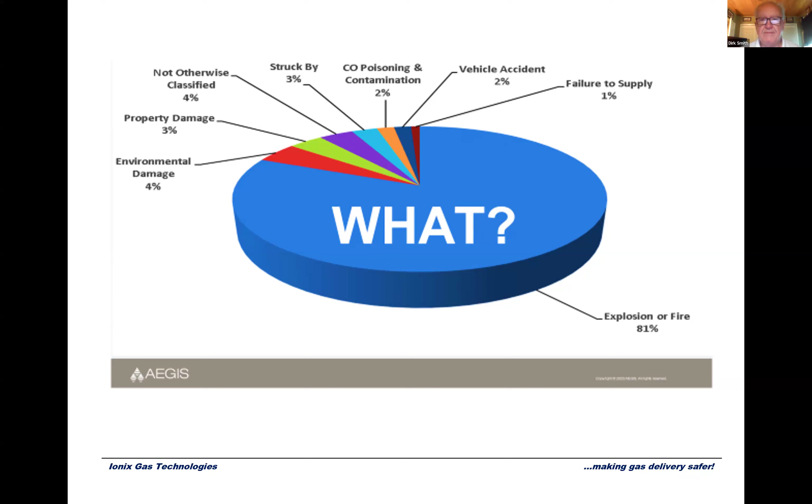But this is a pie chart showing where this insurance company pays out their claims, what causes their claims loss. And if you look here, you can see that fire and explosion are 81%. They constitute more than all the other loss causes combined. So even though fire and explosions are rarer events than vehicular accidents or property damage, they're by far the most expensive. So that's what that tells you. So here's what I want to leave you with when we do this today.

This is based on what I teach natural gas company workers. I want you to have an understanding of static electricity as the probable cause for most ignitions when we have polyethylene or plastic gas pipelines that you will encounter. This has been done by the natural gas distribution industry, who paid the Gas Research Institute and other places to investigate this and explain what's going on. So I'm going to share that research with you.

Now, I'm going to be talking primarily about polypipe because in the natural gas distribution system, in the downstream or local markets, everybody's moving to plastic pipe. There is metal pipe out there, but that is going away as gas services are by law required to be renewed, and they replace them with plastic pipe. So we'll talk about plastic pipe, and we're going to primarily talk about static electricity and plastic pipe, but it'll also apply to metal pipe.

It's important you understand that what we're going to talk about applies the same to propane. A lot of people have propane heat out in areas outside the service areas of local gas distributing companies. The principles that we're going to talk about here are the same for propane.

I want you to be able to recognize where the ignition risk originates in a gas leak. That's one of the things when you're called to a scene and you go out there - I want you to know where you should be looking for the possibility of a static ignition.

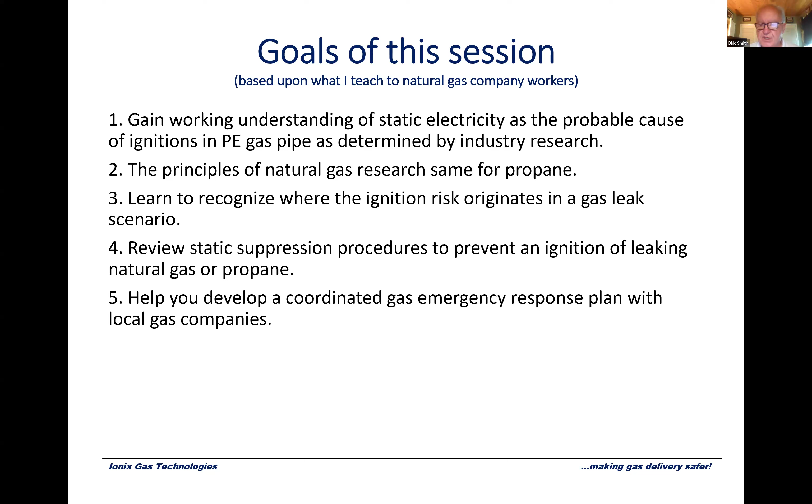Finally, I want to give you some guidelines to develop a coordinated gas emergency response with your local gas companies. Down here in South Florida, we have TECO, some of the local guys, local emergency response - Palm Beach Gardens Fire Rescue. They have a coordinated plan with the local gas company of what they can and can't do. So I'm going to give you some guidelines on how to develop and approach your local gas company and get a coordinated gas response team.

Now, as far as you guys are concerned as firefighters, you're going to go to 3 different locations if you have a gas leak. I'm going to explain the natural gas transport system very quickly because you could possibly respond in one of these 3 areas.

So in gas transport, the first stage is what we call production and gathering. That's where they sink a gas well or an oil well and take the gas out of the ground, and they start to bring it into pipelines. Now, most of you will never ever see a fire or third-party damage on a gas line in production and gathering, because most of these areas are in remote places. But not all of them.

For instance, in Dallas, there are gas wells near residential areas, very close to residential areas. So what will happen is you can possibly have a gas line coming from a gas well in a residential area that you might respond to. They'll always generally be taking this gas in plastic pipe, not metal pipe. But the thing that's concerning about this is many times this gas will not be odorized.

In other words, in all of the local areas, when you have locally delivered gas, it is treated with mercaptan, which is an odorant designed to give a smell test to tell you that you have leaking gas. In production and gathering, when that gas comes out of the ground, it may have some hydrogen sulfide or other things in it, but it does not have an odorant added. And if there's a low sulfur content in the gas, you will not smell that leak.

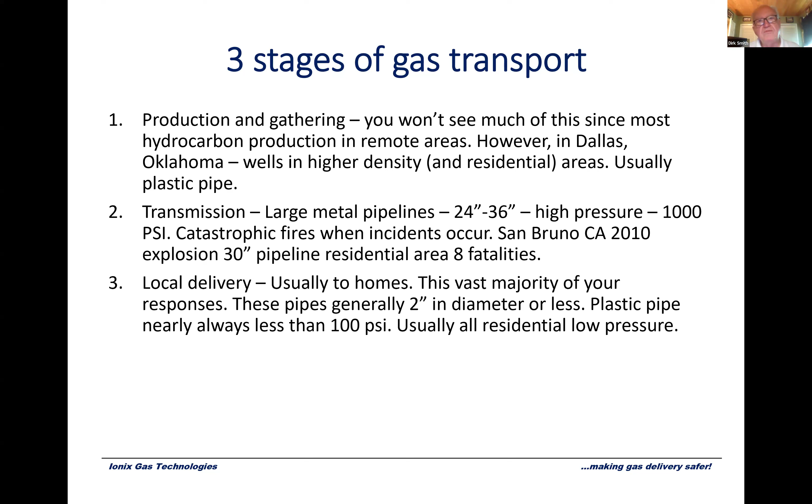So, as I said, in your delivery, when you're responding to a scene, you're going to see 2 types of pipe. The plastic could be yellow, orange, or black - there's a lot of different colors, but they're basically all plastic, just colored differently. Plastic pipe, and we're going to talk about this more in detail, is highly susceptible to static electricity generation, and consequently that's what causes you a big problem. That's what causes ignition, like the third-party damage in Oklahoma you saw in the first video.

This is the preferred piping material, and all the metal is being replaced with plastic when it's time to replace the service. The only limit is plastic pipe is limited to about 100 pounds PSI. There are certain exceptions, but as a general rule, you're not going to find gas pipes that have over 100 PSI. Most of them will be regulated down to less than that.

In metal pipe, they can have a higher pressure, but even then, most of the time now in these metal pipes, they'll also be low pressure. They won't be high pressure. They are also susceptible to static electricity generation, but not to the extent of plastic.

Now, you think because it's static electricity, you ground that out. Well, what everybody thinks is because it's metal, static doesn't build up. That's not true. The reason is there is uncoated metal pipe, but they're phasing that out because it corrodes and causes leaks. If you put a coating on any metal pipe, those coatings are often electrical insulators on the inside and outside of the pipe, and static can build up in there. So when you think of static electricity in a local gas pipe, it can be in a metal pipe too.

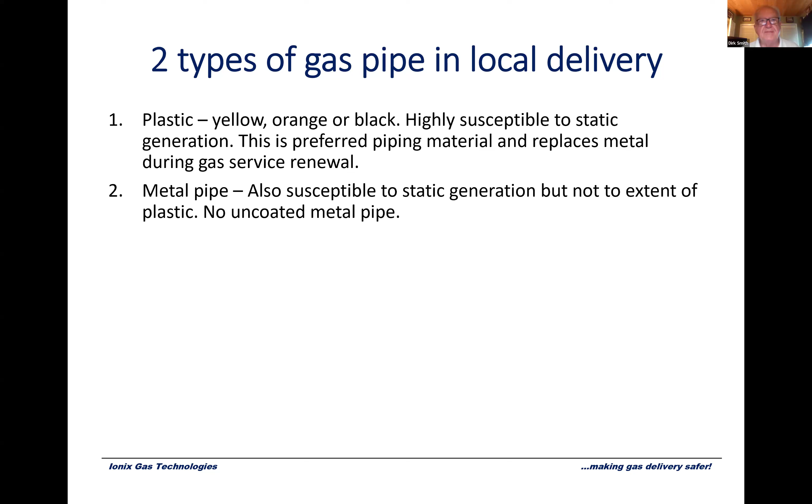Now, real quick, we're going to talk for like 5 to 10 minutes on what static electricity is, because we want to make sure everybody's using the same terminology.

Electricity is electricity. It's either static or current electricity, whether it's on a surface that's an electrical conductor or not. I'm sitting here in my home office today in Boca Raton, Florida. Florida Power and Light has a generator up in Juno Beach, Florida, and this generator strips off a pile of electrons and places them on copper wire. Copper, by its inherent nature, can conduct electricity through it. It's inherent in copper wire. We call those materials electrical conductors.

That is current electricity. So when FP&L puts those electrons on that wire, the electrons follow that wire and come around and deliver it into my computer that powers this presentation.

Static electricity is the same electricity, except it's on a surface that's an electrical insulator and does not allow the movement of electrons. So for instance, that same example, FP&L generates all these electrons, and then they stick it on a piece of polyethylene pipe. Those electrons are just going to sit there. They want to move, but they can't because the material they're sitting on is an electrical insulator. And so consequently, instead of being current electricity that flows through a conductor and has movement, static electricity is an electrical charge that can't move.

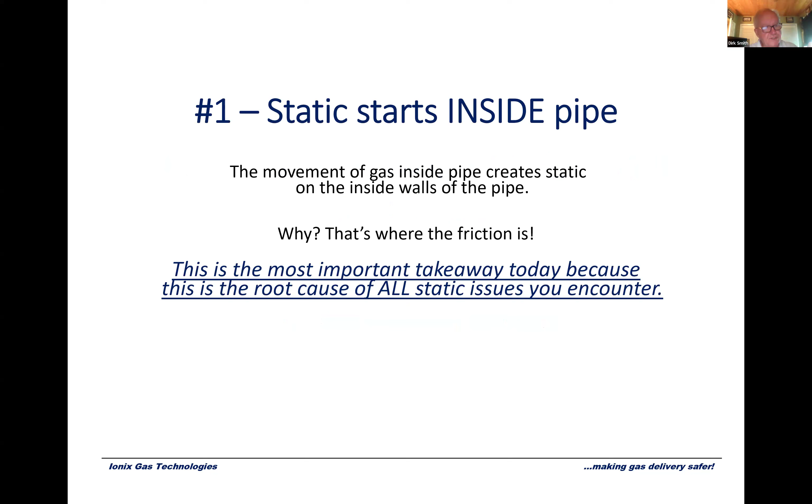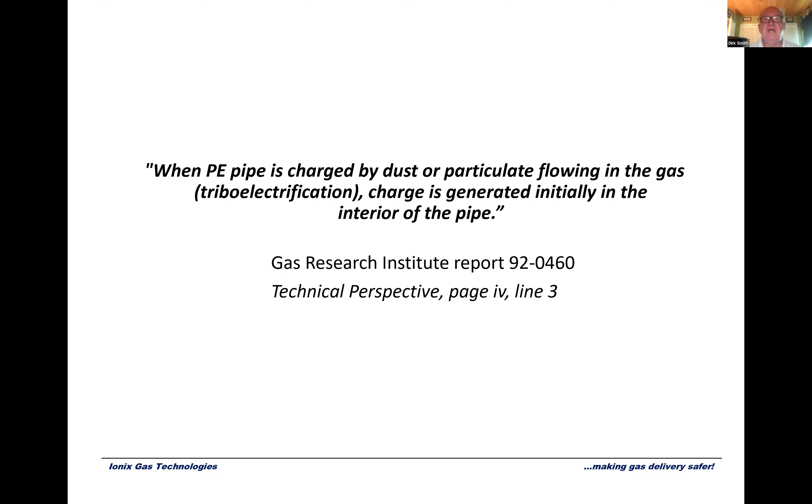And this is the most fundamental thing you need to start. All static starts inside the pipe because that's where the friction is, where the movement is, where it shears off those electrons and they accumulate on the side of the pipe. Here's the citation from the Gas Research Institute: it's saying when gas is flowing through the pipe, that's how static builds up.

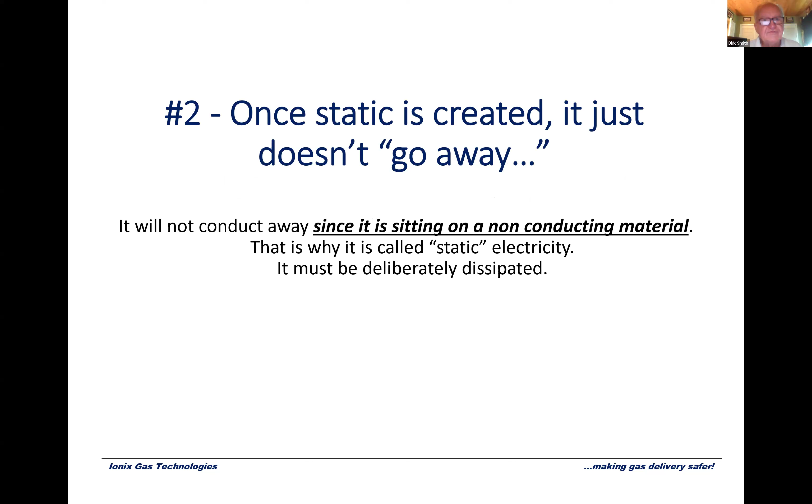Because remember, I explained earlier, static electricity is electricity on a material that can't move. It accumulates, so it just sits there. It can't go away — that's why it's called static. And you have to deliberately dissipate it, or it will arc to ground and dissipate itself. Once again, here's the citation from the Gas Research Institute.

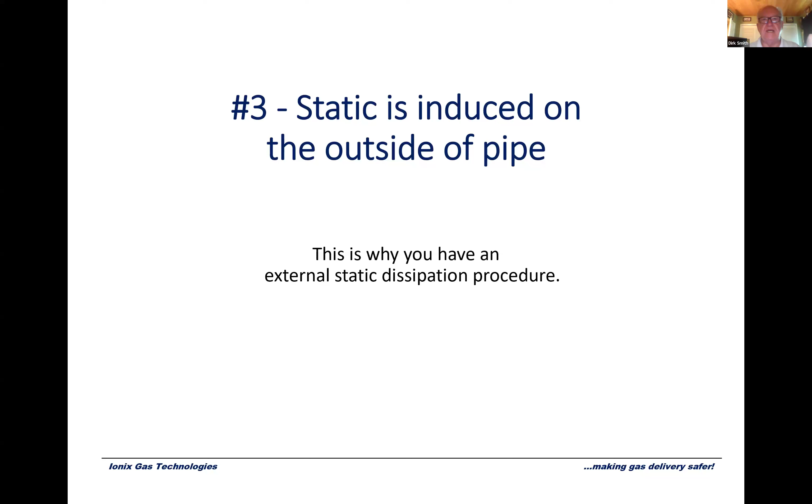It also puts a charge on the outside of the pipe. I could explain it, but it's not necessarily for you to do. That's why you have to dissipate the static on the pipe if you want to prevent an ignition. Once again, here's a citation from the Gas Research Institute.

And finally, static electricity is an electrical charge — it wants to go to electrical neutrality. If you have a gaseous mixture next to it, whether it's methane, propane, or butane, it can ignite.

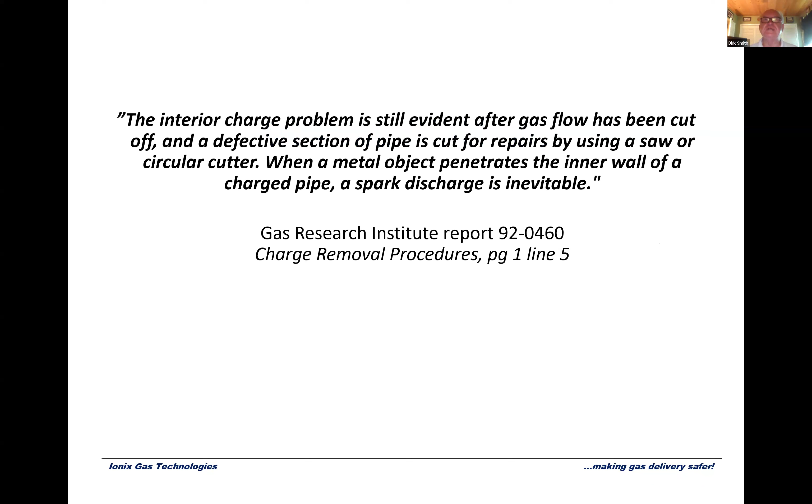If you happen to hit a transmission line carrying butane, all of those things will ignite. Those static charges want to go to electrical neutrality. They will ignite if they're exposed to a charge, and that charge is exposed to ground. That's the basics, and here's a citation about the problem with static charge igniting.

So here's what's happening. When you saw that video at the beginning where Oklahoma Natural Gas had gone out to a location with a cut gas line, what happens is, if you don't have a known ignition source, it's the flow of gas inside the pipe, the friction of the gas going through and exiting where the damage is, that builds up static. And the probable cause, if you have ignition of leaking natural gas with no known ignition source, it has to be static electricity. It must be. And indeed, that's what ONG said when they had that line.

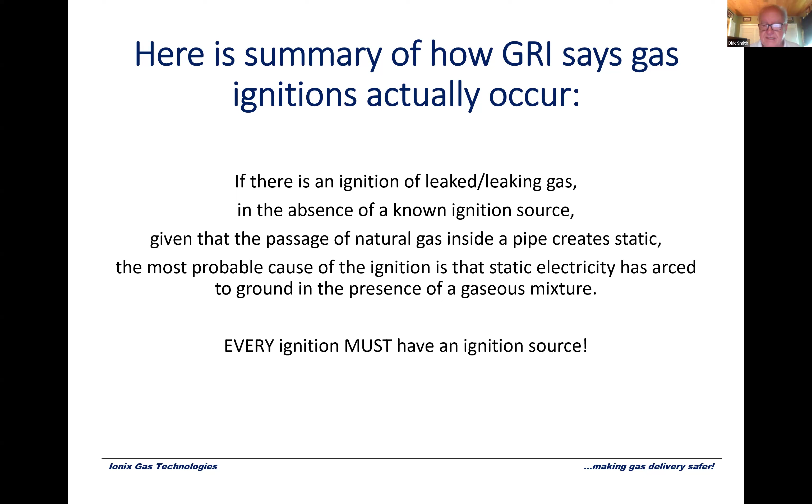Now this is kind of interesting. Polyethylene pipe is a superior material for transporting natural gas. It doesn't corrode, you can hit it, and it's impervious to corrosion or degradation. You can hit it, it'll stretch, it has flexibility. The only problem is when you push natural gas through that polyethylene pipe, it creates its own ignition source: static electricity. And that's what you have to deal with if you respond.

So here's what makes your situation a potential static ignition risk when you respond: you have that interior pipe surface exposed, like that break in the line at ONG; you have a gaseous mixture; and you have proximity to electrical ground. That can be a tool, a worker, dirt, any of those things.

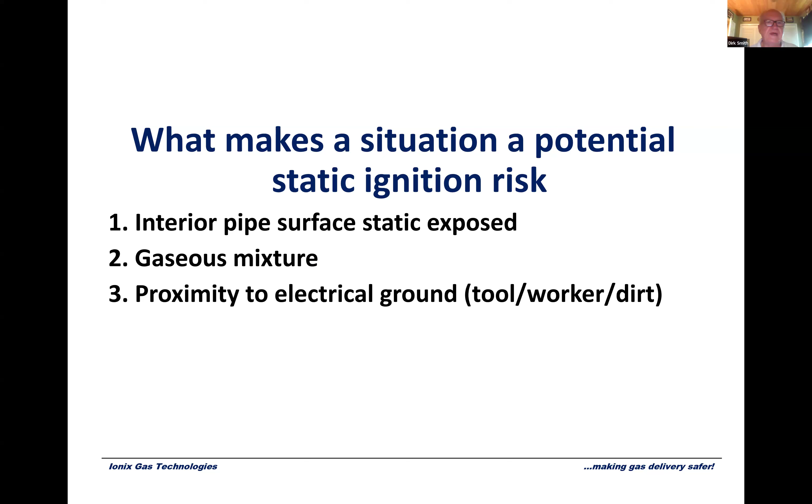So this is what will happen unless you maintain and dissipate the static when you're approaching a natural gas leak.

Now, we've been talking about polyethylene because most of you understand that plastic is a natural accumulator of static electricity. For instance, the old kids' birthday party trick: you blow up a balloon, rub it against their hair, and it sticks to their hair. So if I tell you that static is very susceptible to buildup in a plastic pipe, that's probably not a real surprise to you.

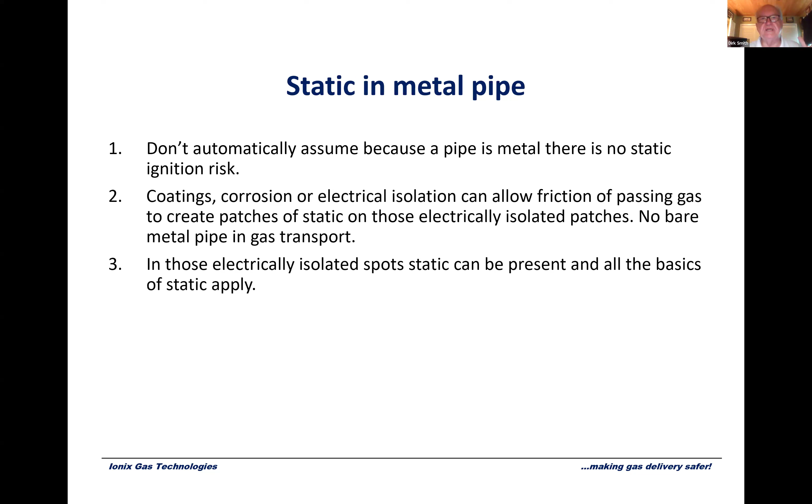However, most people think that since metal is an electrical conductor, you can't have static electricity in metal pipe. Not so. It's because there's still friction inside that pipe, and electrons still get knocked off. What happens is, most pipe anymore, they're getting rid of uncoated metal pipe because it corrodes. All steel or metal pipe in the ground has coatings on it, and those coatings, most of the time, make that surface non-electrically conductive. Therefore, a static charge can build up on it.

This is a photo from AP, Hanoverton, Ohio, 10:30 at night, February 10th, 2011. This is a Tennessee Gas natural pipeline that had a failure in it. I think it's probably 26 to 30 inch pipe. They had a failure in it, and the gas ignited.

Now, the reason I'm showing you this is, one, you're not going to be able to put this out. They have to shut the pipeline down and get the product out of it. However, if you take a look on the left, just to the left of that plume, you'll see a shadow of a structure - that's a silo. This was a farm in the middle of nowhere in Ohio. It was 29 degrees, no weather, no wind, clear skies. My question to you is, what's the ignition source? How could this thing catch fire in the middle of nowhere?

It's static electricity in that metal pipe. When that steel line failed, you had gas escaping. There are surfaces on there that are electrical insulators. Static builds up on those surfaces, gets high enough, and ignites the gas, and there you have a conflagration.

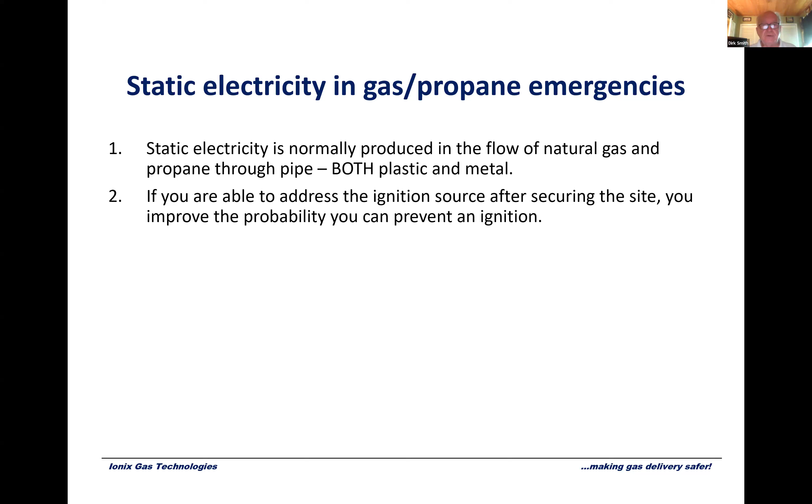You're going to find that static electricity is going to be produced in the flow of both natural gas and propane, in both metal and plastic. You have to assume that to be the case. So if you're able to address the ignition source after you secure the site, you can improve the probability that you can prevent an ignition.

So here we go. You're called, you've got a gas leak. The first thing you have to determine is if the leak is locatable. Because if you're going to deal with the static electricity, you've got to be able to locate the leak, because the static electricity is coming out from the place where it's leaking. It's created at the point of exit of the gas coming out of the pipe.

You're going to have two situations. First, if it's a migrating gas - I know there was an instance once where a sewer contractor nicked a steel line somewhere, finished his work, and just filled it in. Over time, that nick corroded and eventually put a hole in that gas pipe.

The gas started leaking underground and migrating. When that happens, there's no way you can find that leak. It'll migrate into the sewer, into the basement of a house - you don't know, it depends on soil conditions and where it is. But the point is, if you've come into a situation with migrating gas, there's nothing you can do.

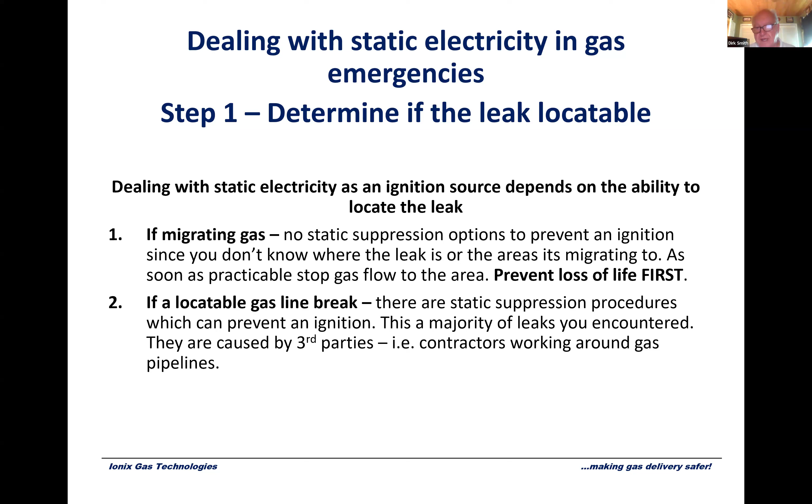Your primary thing is prevent loss of life first, property second. Get everybody out of there, and you're going to have to wait until the gas company can valve that off or shut it off. However, if you have a locatable gas line break, then you can apply static suppression procedures to prevent an ignition. That's probably going to be the majority of leaks you encounter - a locatable line leak, generally caused by third parties.

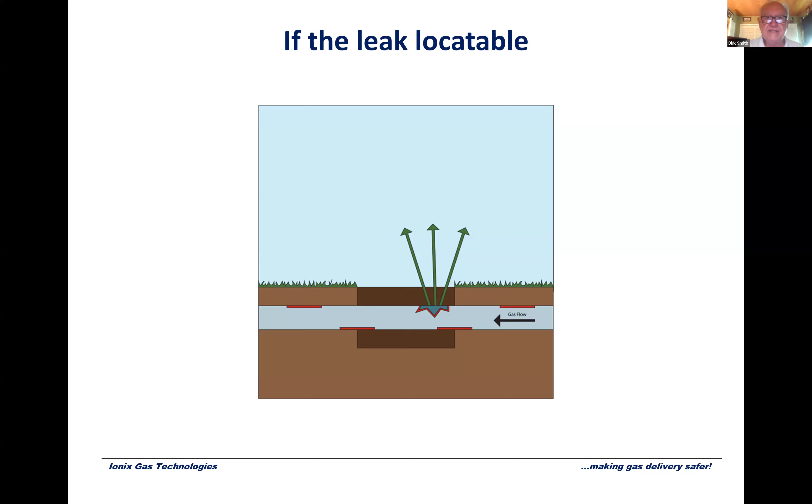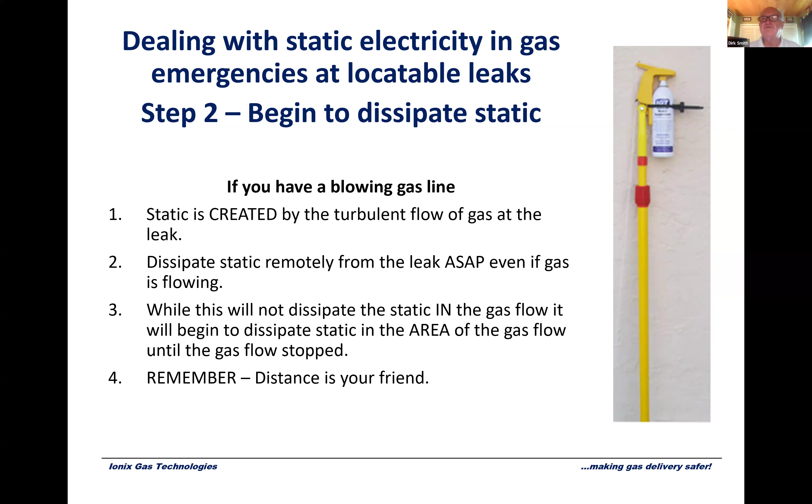Now, if you have a blowing line, this is what I tell my natural gas companies when they go to a third-party damage: you want to try to spray an anti-stat to get as close to the break as you can, wet that area, so you dissipate as much potential static as you can. Now, the problem is the exiting gas at pressure is going to push the aerosol away. That's okay, at least you're getting something on the line until you can stop the flow of gas. Remember, we have a pole for the aerosol so you can apply it from a distance, because distance is your friend.

The farther away you are from a potential ignition, the safer you are. So what we do is, when you have that exposed or damaged pipe available, once you shut it off, you want to spray it again, because you want to get inside there and make sure you dissipate the static. You're going to have methane laying around there. But if you've taken away the potential ignition source, you greatly reduce your risk of an ignition while you're there.

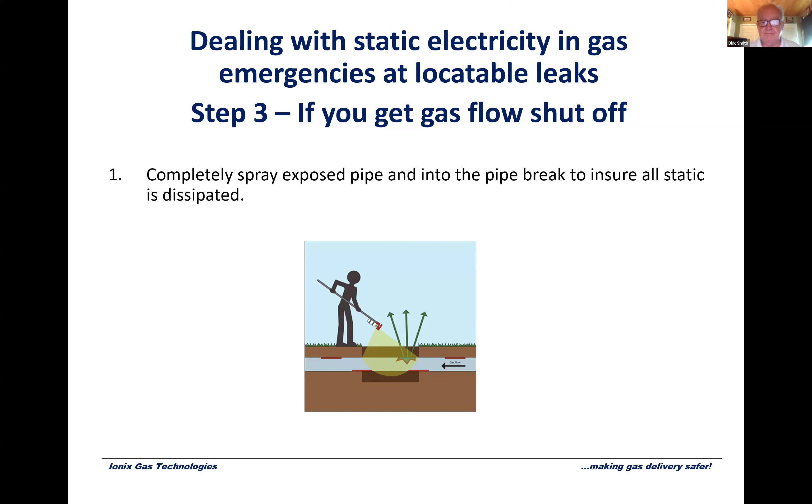Now I want to talk to you a little bit about working with your local gas company. If you don't have any kind of coordination with your local gas company, here's what I'd suggest you do. Down here in South Florida, we have numerous fire rescue guys that put our aerosol on the truck, and they've worked out an emergency response coordination with the local gas company here, TECO, Florida Public Utilities, people like that. Basically, you need to first find your emergency response coordinator for that local gas company, get with them, and determine what degree they'll let you touch their pipes.

Remember, that's theirs. For instance, Manatee Fire Rescue and TECO, a local gas company, have made an agreement: they can work on pipes less than 2 inches. So if they come to a leaking gas site and it's 2 inches or less, they're allowed to go and try to secure the site and maybe pinch off the pipe. You want to find out, usually 2 inches is a fairly large pipe, but most of the time your service lines are going to be 3/4 to 1 inch, maybe even 1/2 inch. So those are fairly safe. 2 inches is a pretty big pipe if you're going to try to manhandle that.

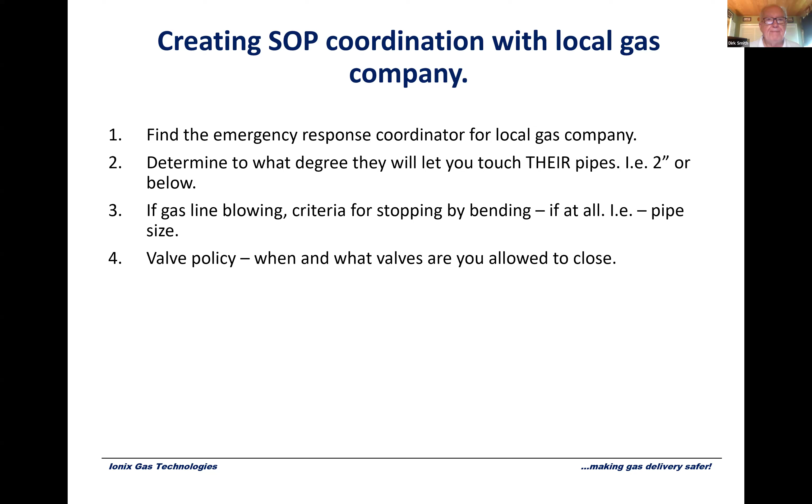Now, when you've found this locatable leak, it's blowing, and you want to bend the pipe, I want to explain something that happens when you do bend the pipe.

What happens is this: there's what's called the Venturi effect. As you take a pipe and start to reduce the dimensions, or start to squeeze it off or bend it, the gas under pressure will attempt to do something called the Venturi effect. The gas will start to speed up to get through that restricted opening. In doing so, it has increased friction on those two areas where the surfaces are coming together. Now, there'll be a point where it will stop, of course.

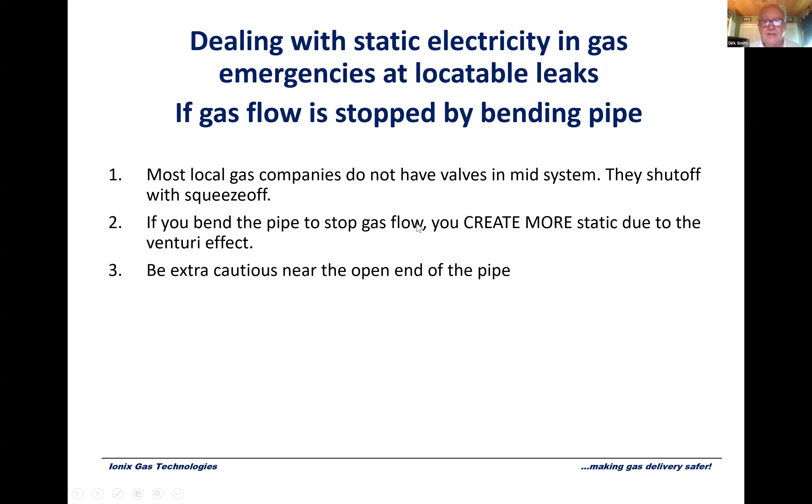But what happens is when you bend that pipe, if you have a policy that lets you bend a 2-inch, an inch and a half, a 1-inch, a half-inch, or a 3/4-inch pipe, you've got to understand you're creating static downstream where you bend that pipe. So you have to be very careful of that because you're creating static.

Our aerosol - now if you look at Manatee, Palm Beach Gardens, West Palm Beach, these guys keep a can of our aerosol on their truck. It's important to understand there are other over-the-counter aerosols, anti-stat aerosols on the market.

However, they are not suitable for gas emergencies, and here's why. Most aerosols in the United States are considered hazardous, and the main reason is because you have to have a gas inside the can to push out the product. Most aerosols in the United States use propane, because it's cheap, doesn't react with any chemicals, it's solvent, mixes in well with the liquids, and compresses well.

Well, the problem is you don't want a potential gas leak and be spraying something that has propane in it. The way you can prove there's propane in it is, like with deodorants - as a kid you'd press the button, get a match, and you'd have a blowtorch. That's the propane inside the aerosol. We use nitrogen as our propellant in our aerosol for the natural gas industry.

It really pushes out the oxygen and therefore enhances your ability to prevent an ignition. So most of our gas companies and fire companies will have a can of our aerosol on their truck in order to spray that pipe, if responding to a gas leak, to make sure it's safe. What happens is it dissipates the static instantaneously, because it works on a chemical basis. That's our reach tool for it.

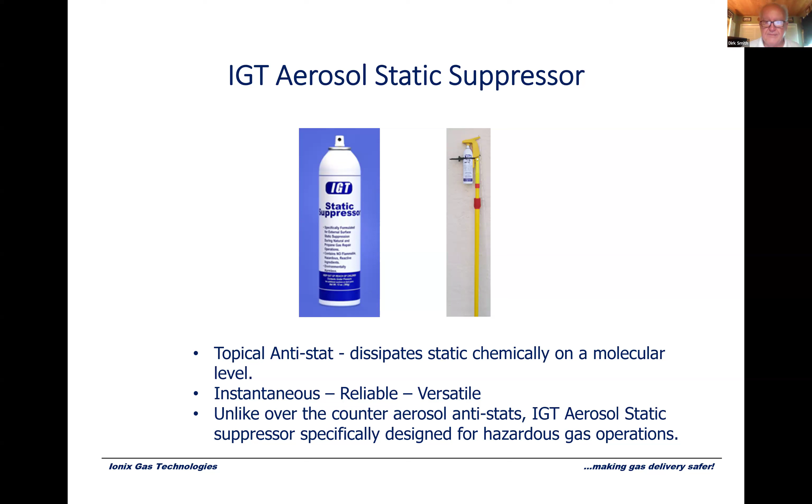Let me show you this. This is a demo we did to show the effectiveness of our aerosol, but I want to put it on here for this reason. Take a look how easy it is for me to generate static on this piece of poly pipe. All I'm doing is rubbing it with a polyester cloth. Just take a look at how easy it is to get a charge buildup, because that's an electrostatic voltmeter.

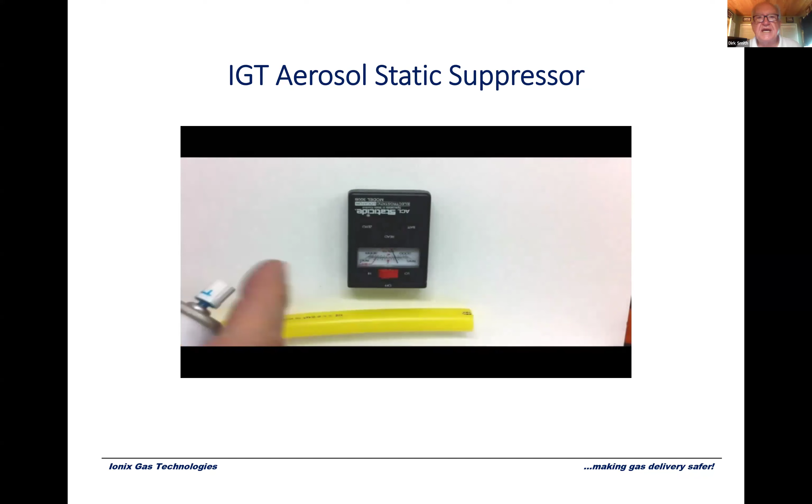What it does is it measures the static on a surface. I just rub that for a few seconds, and you see how fast static electricity built up on it. That just shows how our static suppressor dissipates it.

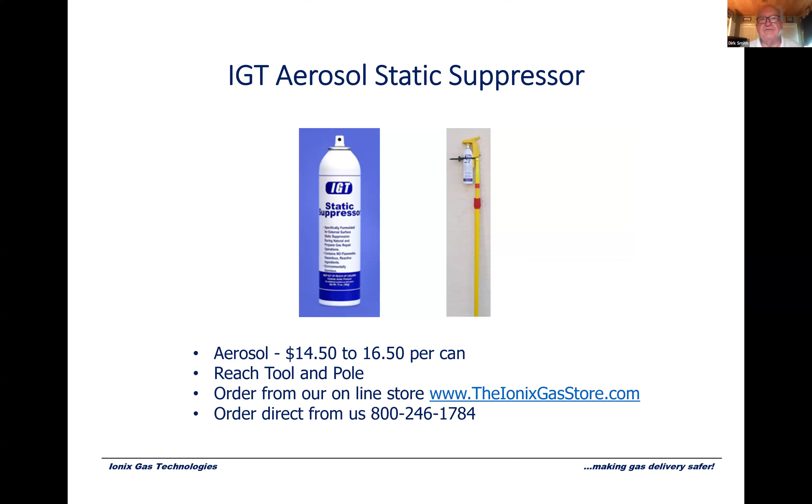So, summary: your first priority is to preserve life, then property. We have to drill this into the guys on the natural gas side. Preserve life first, then property.

You presume that static will be present in a blowing gas line, whether it's metal or plastic. Distance is your friend. Prevent the probable ignition source of a leaky gas pipe by suppressing static electricity. Coordinate with your emergency response coordinator, your local gas company, and determine a standard operating procedure of what you can and can't do - the maximum size pipe you're allowed to address, any meter valve shut off, gas flow stoppage, if you can bend the pipe, whatever. I'd suggest one can of aerosol static suppressor on a responding vehicle.

I have one additional resource for you. Now, I've been very focused on talking about static electricity in a leaking gas response or fire response. I did not talk about staging, how to approach, and all that. National Grid, probably one of the largest natural gas companies in the United States, in the Northeast United States, has a PDF called First Responder Beware. If you want a much more comprehensive resource, beyond dealing with static electricity and a leaking gas line, to develop standard operating procedures for your department on responding to natural gas emergencies.

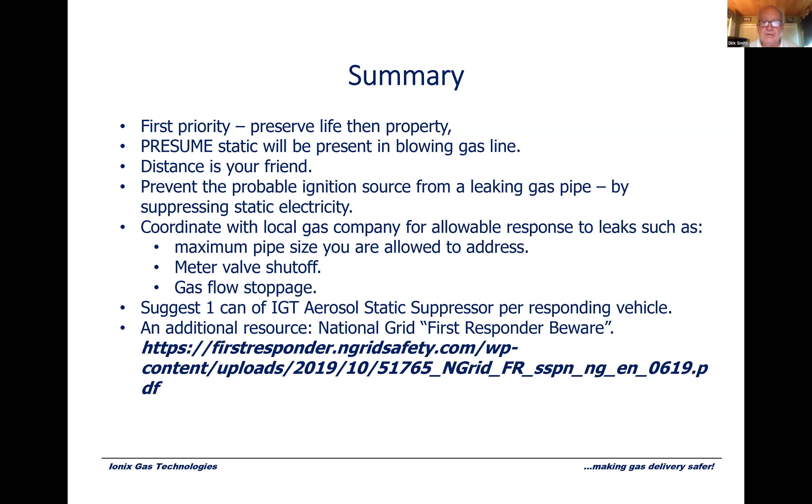Here is the URL. It's very good. It's a PDF and you can download it.